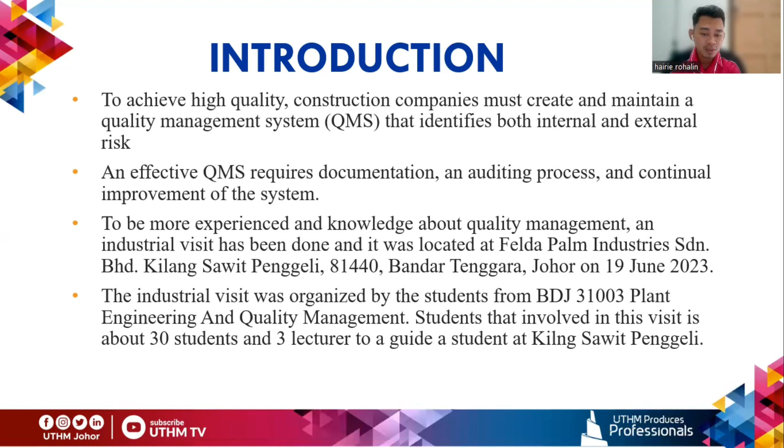The industrial visit was organized by the students from BDJ 31003, Plant Engineering and Quality Management. About 30 students and 3 lecturers were involved in this visit to guide the students at Kilang Sawit Penggeli.

Assalamualaikum. My name is Iezlan bin Ismail and my matric number is DD200112. Today I will present about the problem statement of our industrial visit report and our objective in this report.

Okay, so first the problem statement. The management that has been conducted at Felda Palm Industry already has its effectiveness since they can control their quality of production very well. But on the other hand, the quality management of the industry has the potential to be improved so that it can result in a better quality of production.

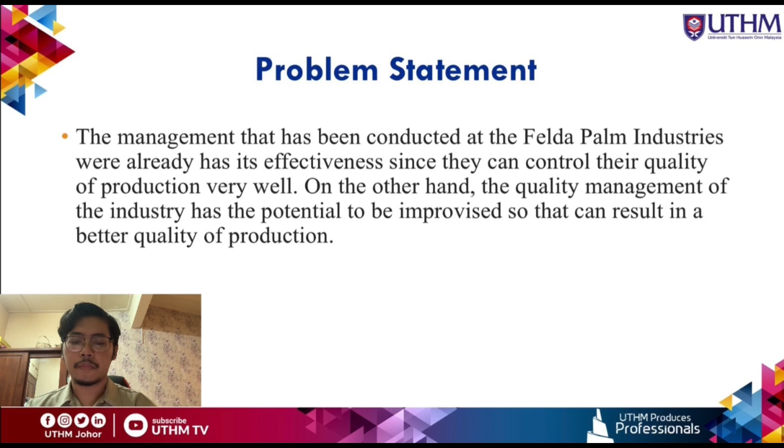Next, moving to the next slide, I will present about the objective of this industrial visit report. The first objective is to explore the quality control measures and management practices in the crude palm oil industry, and the second objective is to identify the possible improvement in quality and management for the crude palm oil industry.

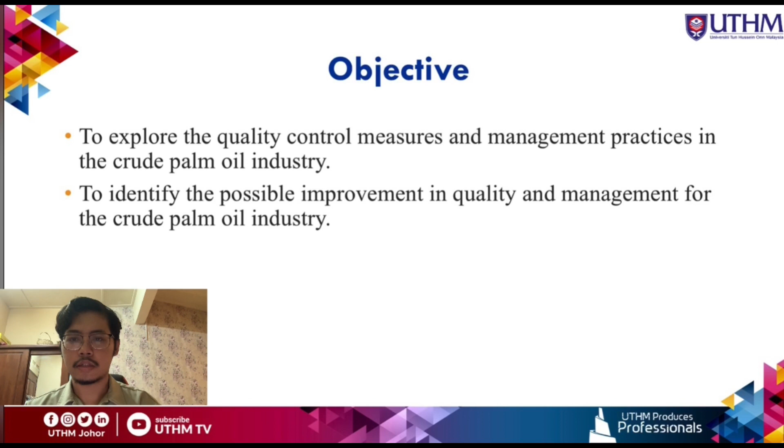Next is literature review. Earlier evolution of TQM focused on manufacturing and production industry more than service industries. However, the high level of competition and the rise in service industry share increase the need for TQM in services, from Juneja 2011. From the TQM implementation approach, services are somehow different from products. The intangibility of service creates measurement problems, while dependency on customer evaluation leads firms to be customer-led.

Lenka, Suar, and Mohapatra 2010 assert that TQM practices in service firms are different from manufacturing firms. Manufacturing organizations vary from service organizations in process, operation, products, features, and customer relationship. Manufacturing organizations focus on process and product quality, while service organizations focus more on customer satisfaction.

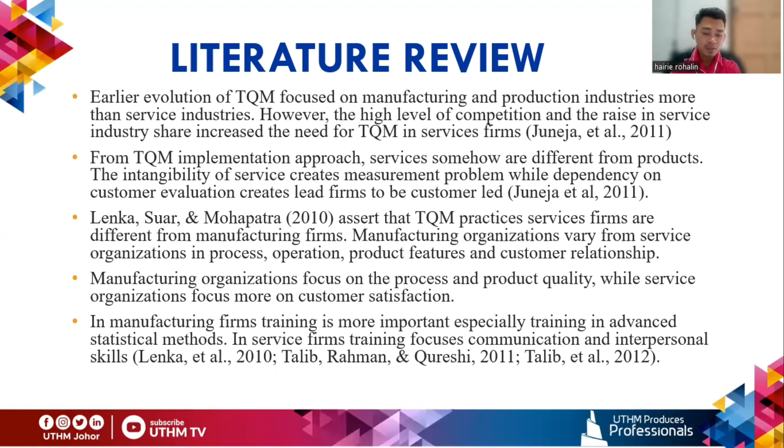In manufacturing firms, training is more important, especially training in advanced skills and statistical methods. In service firms, training focuses on communication and interpersonal skills.

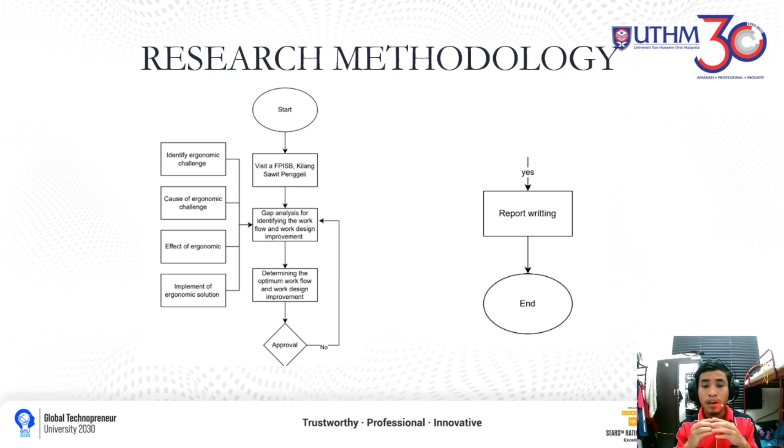This stage has a question to answer. If no, we go back to gap analysis for identifying the workflow and work design. If yes, we go on to report writing and go to the end.

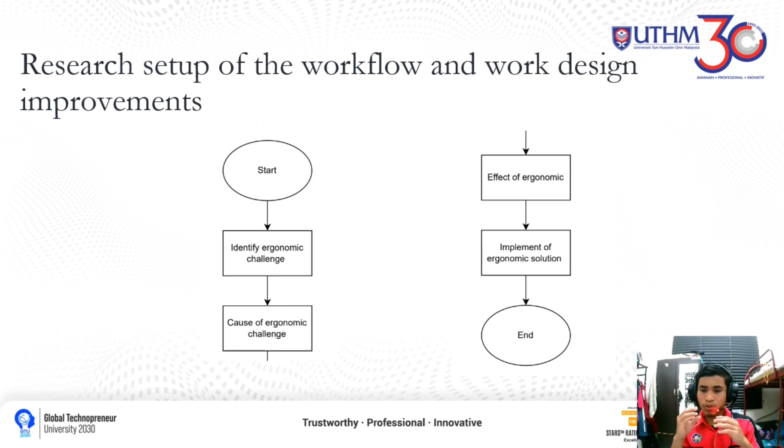Okay, for the next slide, I would like to present about the research setup of the workflow and work design improvement in this research. First, we begin from the start. After that, we go to identify ergonomic challenges. Second, causes of ergonomic challenges. Third, effects of ergonomics. Fourth, implementation of the ergonomic solution. And lastly, we go to the end.

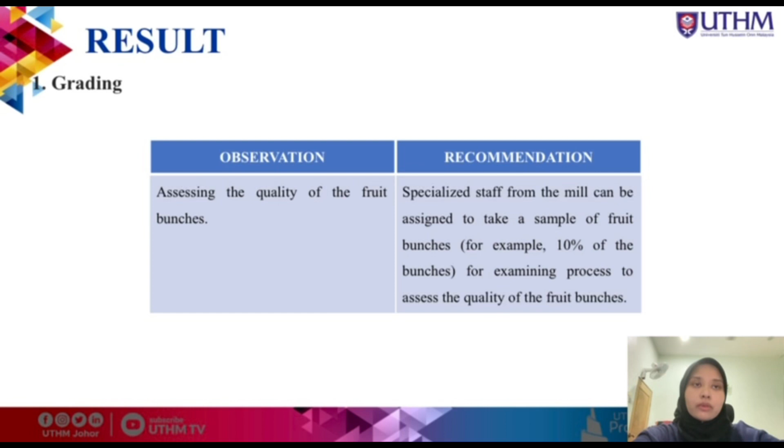Assalamualaikum warahmatullahi wabarakatuh. So I will present the results for this project. Number 1, grading. It is assessing the quality of the fruit bunches. It is recommended that specialized staff from the mill be assigned to take a sample of fruit bunches, for example, 10% of the bunches, for the examining process to assess the quality of the fruit bunches.

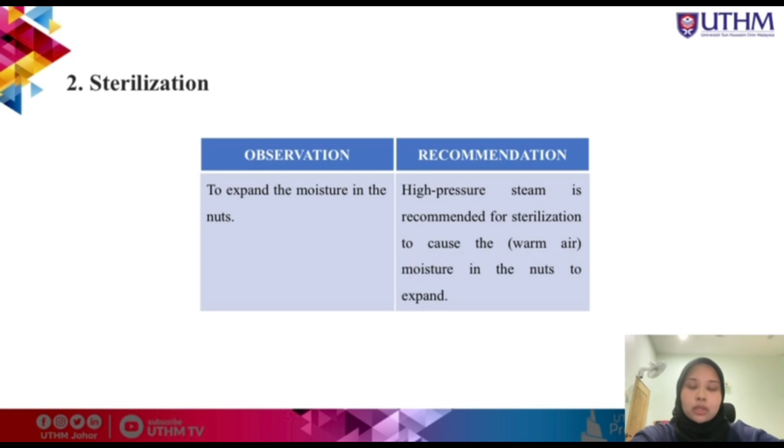Number 2, sterilization. It is to expand the moisture in the nuts. High pressure steam is recommended for sterilization to cause the warm air, which is the moisture in the nuts, to expand. Next, threshing, which is to separate palm fruit from the bunches. It is recommended to use strong vibration to separate palm fruit from palm bunches efficiently.

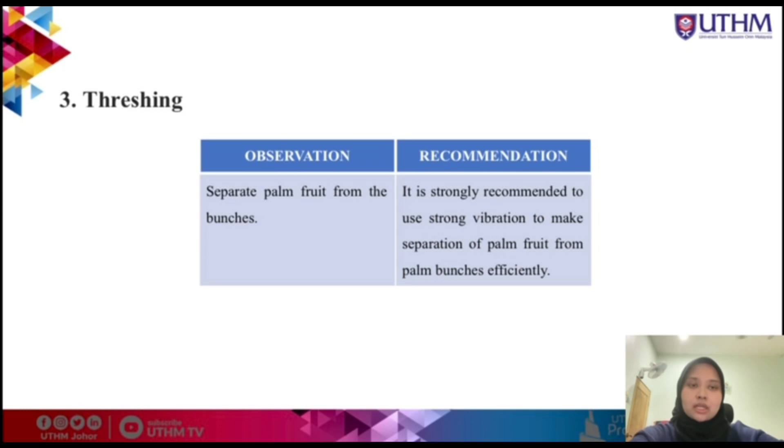Digestion. Digestion destroys the exocarp of palm fruit. It is recommended to run the digesting process under high temperature to destroy the exocarp of palm fruit, disrupt the oil cells, and reduce the viscosity of the oil.

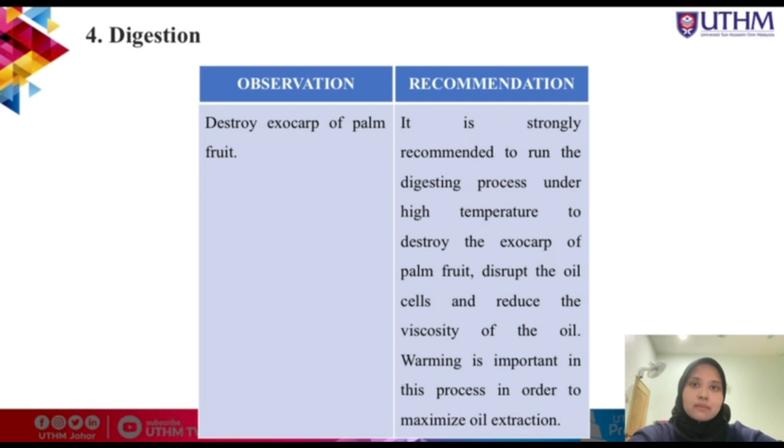Warming is important in this process in order to maximize oil extraction. And lastly, for safety, slippery floor. So it is recommended to make sure that the cleanliness of the workspace is in the best condition. This is important because a slippery workstation may cause danger to the worker or the visitor.

Weak railing. Make sure that the railing that is already swaying and rusted can be replaced with a new one or tightened with screws, bolts or nuts so that the existing railing can be used firmly. This is important because weak railing may cause workers or visitors to fall from high places, which can cause danger.

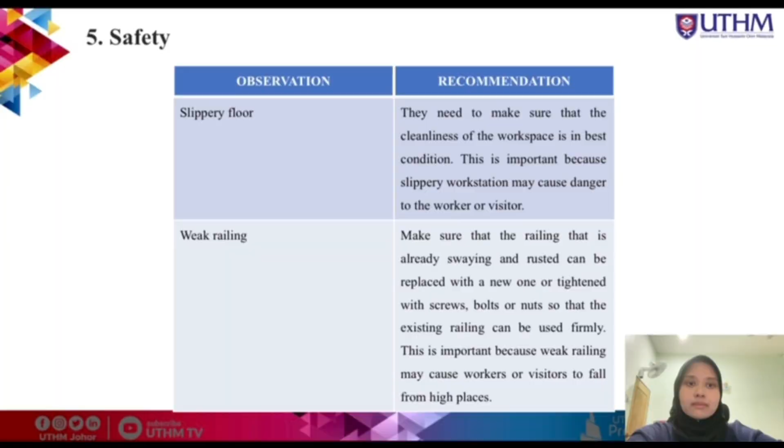From the grading process, in order to acquire higher manufacturing efficiency and quality, each workstation has to be improved. The design of each workstation can be examined and redesigned, which might end up being beneficial. We acknowledge that the factory layout can be improved in a variety of ways.

To improve the grading process, specialized staff from the mill can be assigned to take a sample of fruit bunches, for example, 10% of the bunches, for examination to assess the quality of the fruit bunches. Poor quality fruit bunches, for example, bunches that are unripe or very small, are given a deduction, usually in kilograms, because they produce less oil.

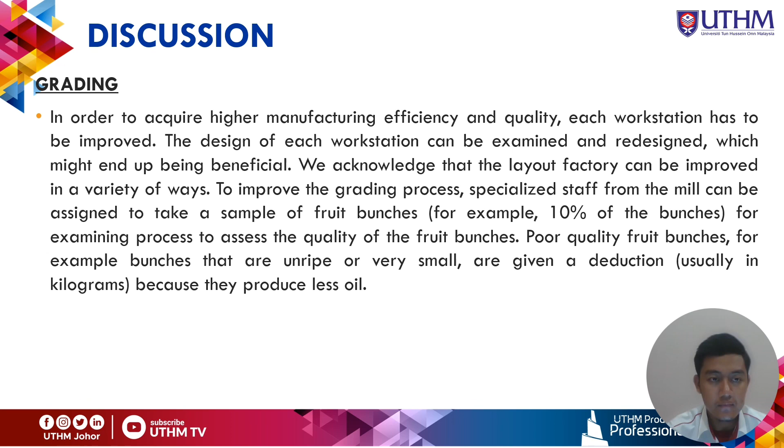For the sterilization process, the sterilization or cooking station of a palm oil mill is a process to loosen fruit by use of high temperature wet heat treatment. The difference between cooking and sterilization is that cooking uses hot water, whereas sterilization involves the use of pressurized steam.

To improve the sterilization process, high pressure steam is recommended for sterilization to cause the warm air moisture in the nuts to expand. Reducing the pressure causes contraction of the nut and detachment of the kernel within their shells.

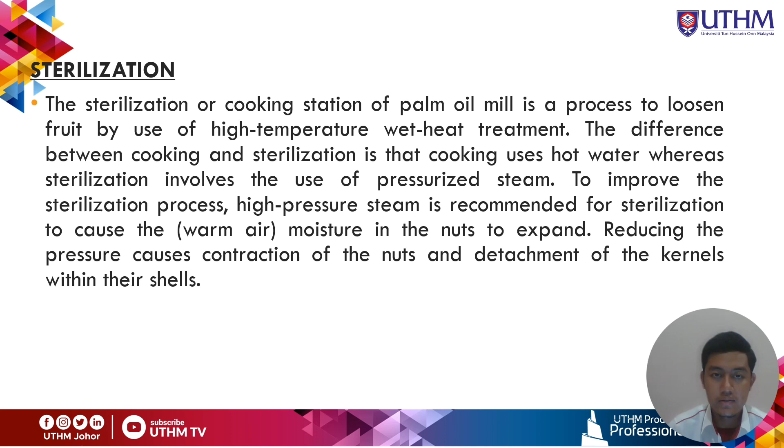For the threshing process, threshing is the process whereby the bunch is thrown on the revolving beater shaft. Due to the action of the beater, the entire bunch is thrown up and is allowed to fall again and again on the revolving beaters. Thus, palm fruits are separated and fall down through the screen, which are collected by the bottom conveyor and taken out from the outlet. The fruits are separated from bunches in a rotating drum.

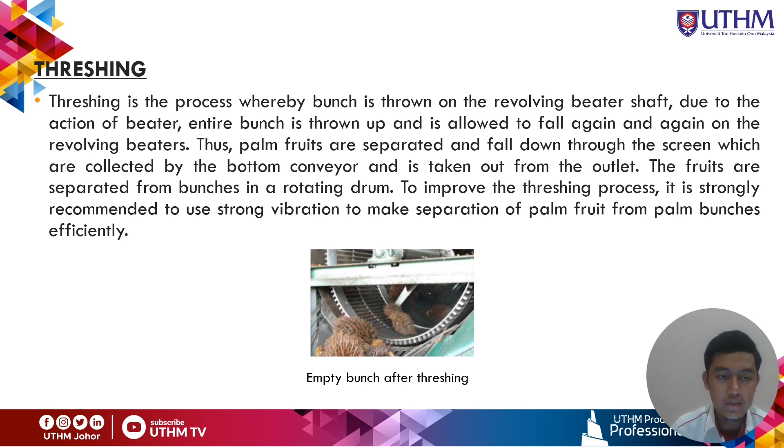To improve the threshing process, it is strongly recommended to use strong vibration to make separation of palm fruit from palm bunches efficient.

For the digestion process, the purpose of digestion in a palm oil processing plant is to rupture the oil-bearing cells of the fruit and release the palm oil. The digester is a steam-heated cylindrical vessel. In the digester, there is a central rotating shaft carrying a number of beater arms which are used to pound the fruit.

In order to achieve higher productivity, it is strongly recommended to run the digesting process under high temperature to destroy the exocarp of the palm fruit, disrupt the oil cells, and reduce the viscosity of the oil. Warming is important in this process in order to maximize the oil extraction.

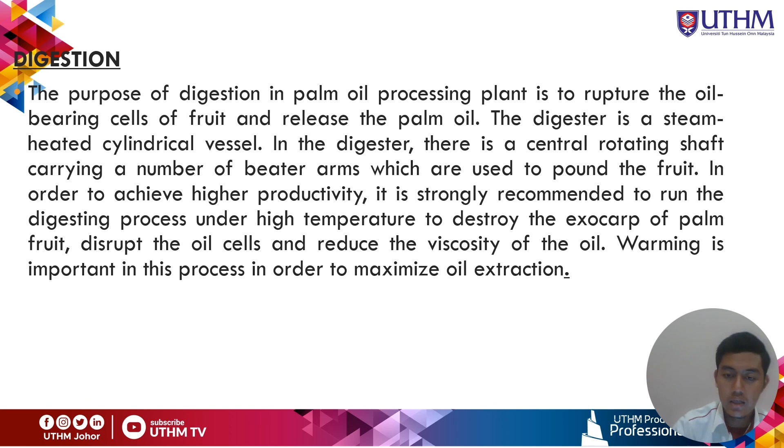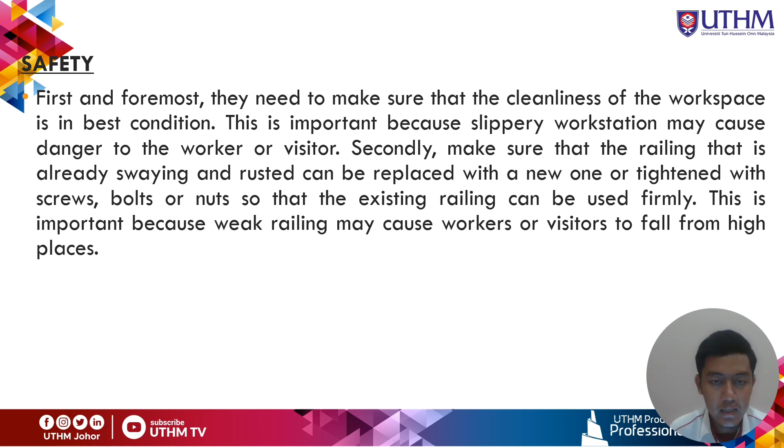In terms of safety, first and foremost, they need to make sure that the cleanliness of the workspace is in the best condition. This is important because a slippery workstation may cause danger to the worker or visitor. Secondly, make sure that the railing that is already swaying and rusted can be replaced with a new one or tightened with screws, bolts or nuts so that the existing railing can be used firmly. This is important because weak railing may cause workers or visitors to fall from high places.

And for the conclusion, we may draw the conclusion that the project's success is entirely dependent on what we have learned from our experience studying line balancing and time measurement in class, based on the information collected from the site visit project. Based on the result of the analysis, the project's overall goal has been met.

We chose to apply the knowledge we obtained about quality management to our project scope by reducing the time study or time frame, minimizing the number of stations in line balancing, and improving the layout. The major goal of this project is to make the factory layout better.

The industrial visit also aided our understanding of the steps taken in producing crude palm oil. By doing it, we are able to have a deeper understanding of the process flow, concentration, technology use, and improvements that have already been made, and those that can be made to raise the production and management quality.